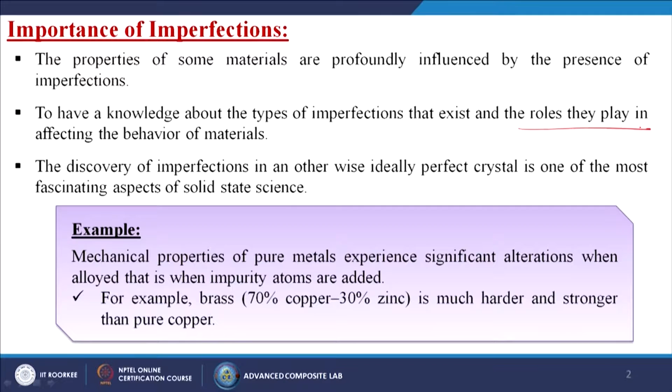For example, brass is made of copper and zinc. If we compare the properties of brass to copper, we find that the brass properties are better than pure copper.

Now we have to know what imperfections are. An ideally perfect crystal is one which has unit cells and contains lattice points throughout the crystal, as we have already read.

The term imperfections, or sometimes called a defect, is generally used to describe any deviations, meaning any little deviations of the ideally perfect crystal, meaning there are some problems in the crystal structure from the periodic arrangement of its constituents.

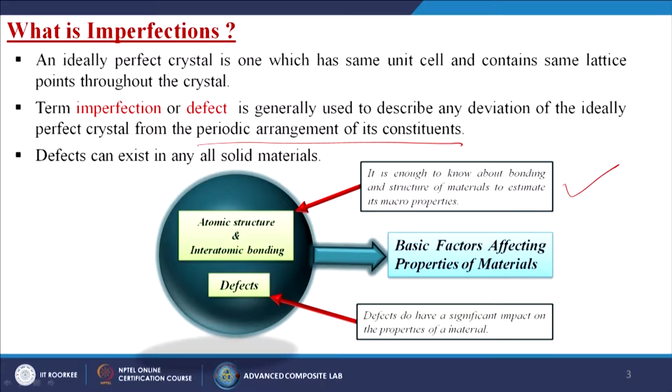Defects can exist in all solid materials. There are some basic factors generally affecting the properties of materials. The first is atomic structure and interatomic bonding. It is enough to know about the bonding and structure of materials to estimate its macro properties, and the other is defects, which have a significant impact on the properties of a material.

First we have to know what crystalline defects are. Generally, crystalline defects mean a lattice irregularity having one or more of its dimensions on the order of an atomic diameter. Generally a crystal or material has a specific crystal structure.

In that crystal structure we can see some kind of vacancy, some kind of defects. These are all known as the crystalline defects of that particular material.

Defects in the crystalline structure can have a tremendous effect on material behavior, because we can change or substitute host atoms, or put new atoms inside the host atoms. This way we can change the material properties.

Physical, electrical, magnetic and optical properties of crystalline materials can be modified by controlling the imperfections in their lattice structure. For ease of characterization, defects are classified on the basis of their geometry or types, as defects are disrupted regions in a volume of solids.

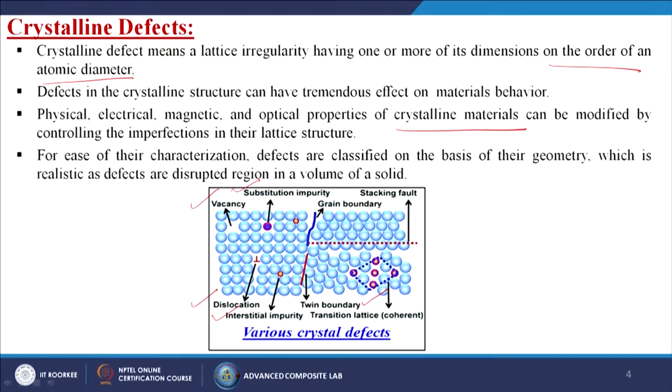From this image we can see there are many types of defects like vacancy, dislocations, some kind of impurity like substitutional impurity or interstitial impurity, some kind of twin boundary problem, grain boundary or stacking fault. There are many types of defects which we are going to discuss one by one in the subsequent slides.

First we have to know the broad classifications of defects based on dimensionality. We can divide defects into 5 types. The first one is called point defects or 0D defects, like vacancy, self-interstitial, and impurity.

If we talk about 1D defects, also known as line defects, like edge dislocations, screw dislocations, and mixed dislocations.

If we talk about surface defects, which are 2D in nature, that is external surfaces, grain boundaries, and twin boundaries.

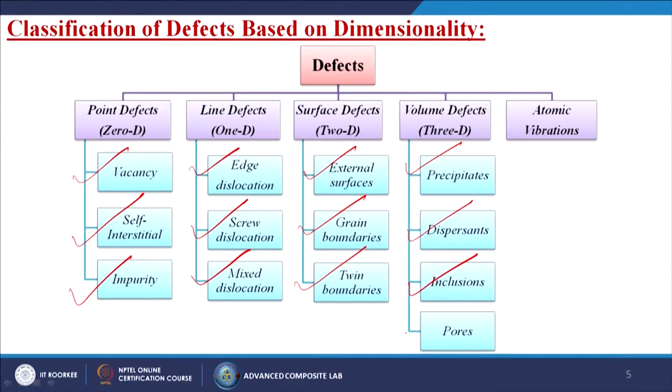And when we talk about volume defects, which are 3D in nature, or sometimes called 3D defects, these are precipitates, dispersants, inclusions and pores, and the last one is known as atomic vibrations.

So, first, what is point defects? Point defects means it is an imperfect point-like region in the crystal, a single point type of defect in the crystal structure. Typical size is about 1 to 2 atomic diameters, also called the 0 dimensional defects. There are several types of point defects like vacancy, impurity, and self interstitial.

What is vacancy? Vacancy is the absence of an atom from its regular atomic site. From this particular image you can see that in this gap some atom should be present, but it is not. So some vacant site has been created, that is known as the vacancy.

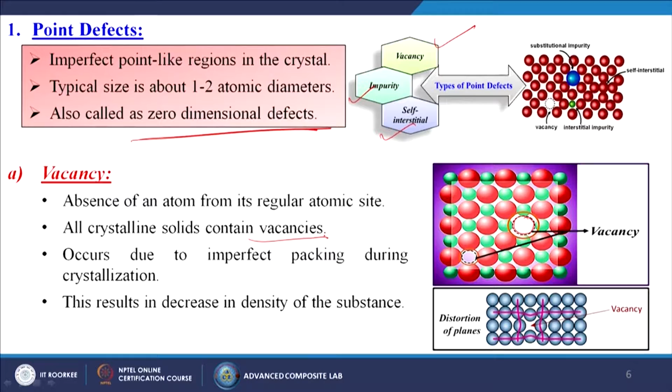All crystalline solids contain vacancies, occurring due to imperfect packing during crystallization. This results in decrease in density of the substance. Yes, of course, because generally the crystal structure is very closely packed. If there is a gap in between, automatically the density will decrease.

So what is the necessity of the existence of vacancies? Generally it can be proved by the principle of thermodynamics. The presence of vacancies increases the entropy or randomness of the crystal. As I told already, when there is no vacancy the atoms are very closely packed, but when any vacancy or gap has been generated, the atoms will try to move in between those gaps.

So the equilibrium number of vacancies, denoted by NV, for a given quantity of material is given by n times exponential of minus QV by KT, where n is the total number of atomic sites, QV is the energy required for formation of the vacancy, and T is the absolute temperature.

So if at the time of calculation of the equilibrium number of vacancies our temperature is in degree centigrade, we have to convert it into Kelvin, and K is known as the Boltzmann constant.

So what is the value of that Boltzmann constant? Generally if the energy is in joules, the value of the Boltzmann constant will be 1.38 into 10 to the power minus 23 joule per atom Kelvin, and if the energy is in electron volts, then the value will be 8.62 into 10 to the power minus 5 electron volt per atom Kelvin.

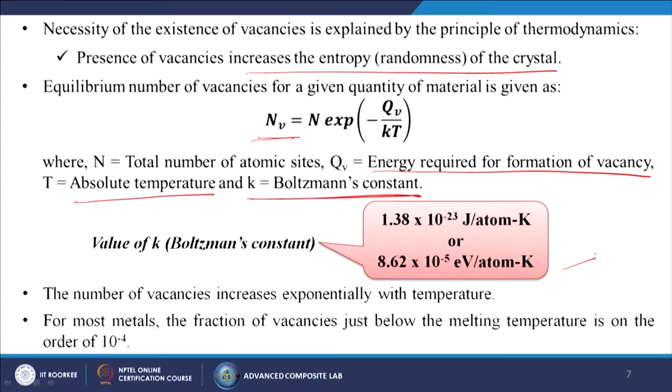Now we are going to discuss about the self interstitial. If the matrix atom occupies its own interstitial site, because from the name itself we can understand that this has been done or created by the host atom itself, the defect is called the self interstitial.

This defect increases the density of the substance. Yes, of course, because there is no vacant place left.

In metals, a self interstitial introduces relatively large distortions in the surrounding lattice strain, since the atom is substantially larger than the interstitial site. In this particular case you can see that the self interstitial atom has been inserted or has taken a place in between the atoms, and it is giving a pressure or strain to the surrounding atoms.

Formation of this defect is not highly probable. It exists in very small concentrations, which are significantly lower than for vacancies.

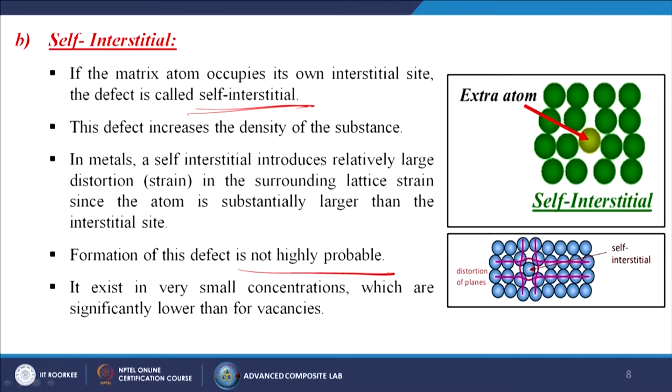Now we are going to discuss about the impurity. Impurity atoms are added intentionally in alloys to impart specific characteristics to the materials.

Yes, of course, sometimes knowingly or unknowingly we are adding impurities to the system, or to the matrix, or to the alloys, or composites. Sometimes we are adding materials with known variations or compositions to increase certain properties. Sometimes while preparing composites, we are adding so many constituents, and through those constituents some impurity unknowingly comes into the system.

Alloying is used in metals to improve the mechanical strength and corrosion resistance. For example, sterling silver is made of 92.5% silver with 7.5% copper alloy.

If I give an example of gold ornaments, generally we are not using 100% gold, because otherwise it will not be malleable. To make the gold into a malleable format, we are adding some kind of material into it so that it can be malleable. Alloying with copper enhances the mechanical strength without depreciating the corrosion resistance, as in the case of sterling silver.

Additions of impurity atoms to a metal will result in the formation of a solid solution or maybe a new second phase. So generally in a system I am having the host atom, and then from outside I am adding another third party atom. A solid solution forms when solute atoms are added to the host material.

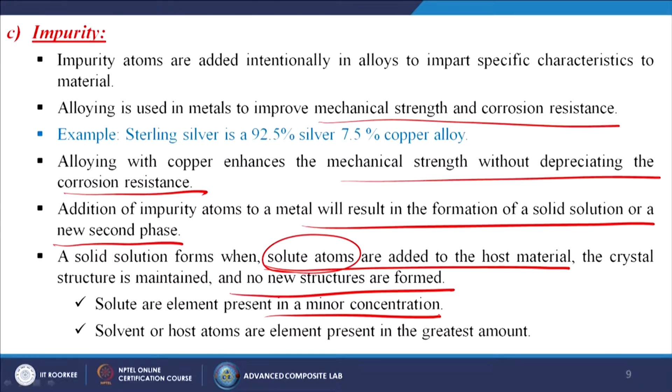Generally there are two ways: solute or impurity elements present in minor concentrations, meaning whatever impurity is added, its concentration or quantity is very less. The other is the solvent or host atoms, whose number is very large, or the greatest amount.

A solid solution is also compositionally homogeneous. Solid solution formation generally depends on three characteristics: the kind of impurity, the concentration, and the temperature of the alloy.

On the right hand side you can see the solid solution of zinc in copper, where the atoms are perfectly in order. But when we talk about compounds, the atoms are very closely packed, but not in order. That is the basic difference between solid solutions and compounds.

Now, if we look at impurity, there are two types: substitutional and interstitial. From the name itself, substitutional means it is substituting some atom. So solute or impurity atoms replace or substitute for host atoms inside the crystal structure.

When talking about interstitial, impurity atoms fill voids or interstices among the host atoms. There is a certain gap, and in between that gap the impurity atom takes place or occupies that area.

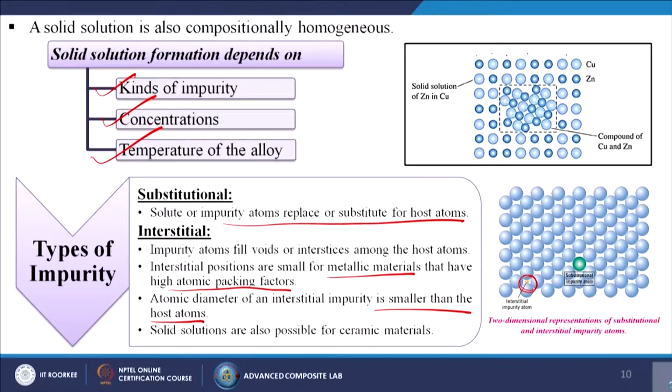Solid solutions are also possible for ceramic materials. Now, what are the factors which determine the degree of dissolving of solute in solvent atoms? The first is the atomic size factor.

The difference in atomic radii between the two atom types should be less than about 15%. Otherwise, the solute atoms will create substantial lattice distortions and a new phase will form. But this is only valid for substitutional impurity, not interstitial.

Then crystal structure: the crystal structure for metals of both atom types must be the same. Then electronegativity: the more electropositive one element and more electronegative the other, the greater the likelihood that they will form an intermetallic compound instead of a substitutional solid solution.

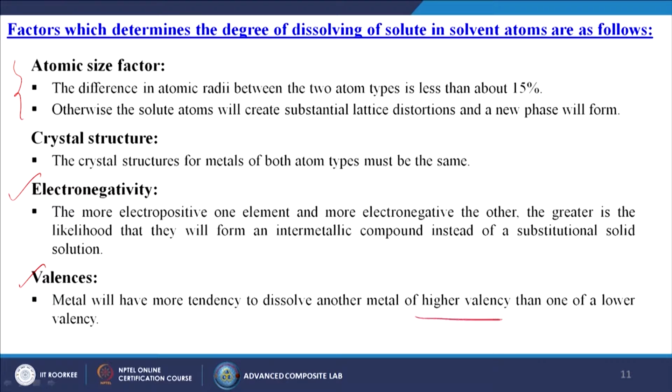Then valences: a metal will have more tendency to dissolve another metal of higher valency than one of lower valency. So these are all the important parameters.

Suppose when we are trying to make any kind of new composites, or doing doping, or inserting impurities into some base metal, these are generally the factors we need to look at. Based on that, we have to choose the proper materials or impurities, and insert them into the host material.

Now what are the specifications of composition? Composition or concentration is the relative content of a specific element or constituent in an alloy. There are two most common ways to specify composition: weight percent and atom percent.

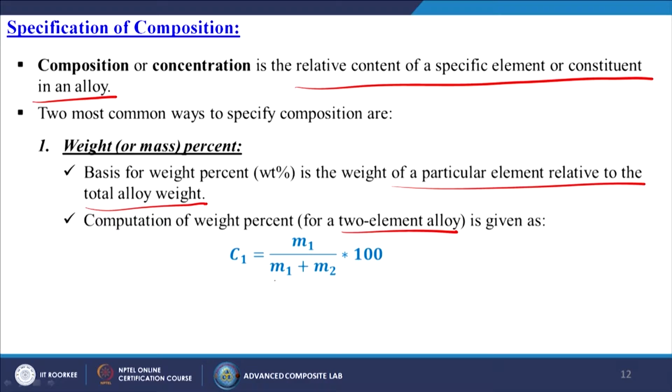What is weight percent? The basis for weight percent is the weight of a particular element relative to the total alloy weight. The computation of weight percent for a 2 element alloy is given as C1 equals M1 divided by (M1 plus M2), times 100, where M1 is for one element and M2 for the second element.

Now, when talking about atom percent, the basis for atom percent calculations is the number of moles of an element in relation to the total moles of elements in the alloy. The number of moles in some specified mass of a hypothetical element 1 may be computed as NM1 equals M1 divided by A1, where M1 and A1 denote the mass in grams and atomic weight for element 1.

The computation of atom percent for a 2 element alloy is given as C1 prime equals NM1 divided by (NM1 plus NM2), times 100. This is how we calculate the weight percentage or atom percent of different elements.

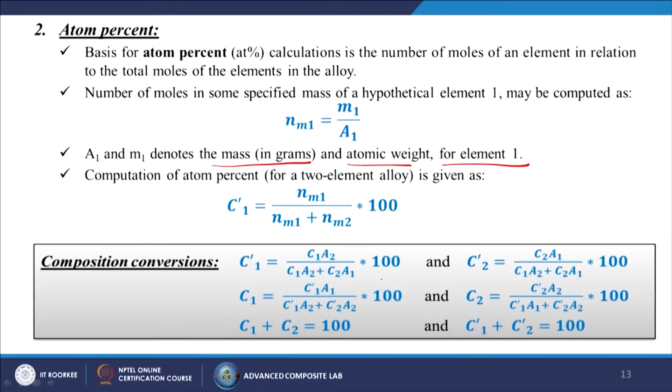We get C1 prime is equal to C1 A2 by C1 A2 plus C2 A1 into 100, and C1 is equal to C1 prime into A1 by C1 prime A1 plus C2 prime A2 into 100. But in any of the cases, C1 plus C2 will be 100, because total composition constituent is 100, or maybe C1 prime plus C2 prime will be 100.

Now, convert the concentrations from weight percent to mass of one component per unit volume of material. So, from units of weight percent to kg per meter cube, the conversion is C1 double prime is equal to C1 by rho 1 plus C2 by rho 2 into 1000, and C2 double prime is equal to C2 by C1 by rho 1 plus C2 by rho 2 into 1000. For density rho in units of gram per centimeter cube, these expressions yield C1 double prime and C2 double prime in kg per meter cube.

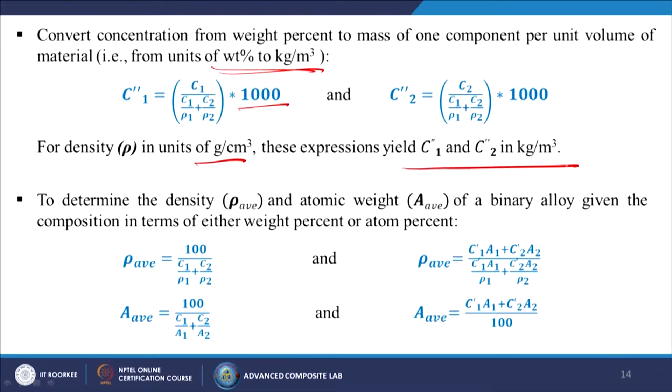This way we can calculate the average density and the average atomic weight of that particular atoms or constituents.

Now we are going to discuss line defects. Generally, from the name itself you can understand the defect takes place along a line, or looks like a line, inside the crystal structure. Line imperfections are also called linear dislocations. They are abrupt changes in the regular ordering of atoms along a line, or dislocation line, in the solids, occur in high densities and strongly influence the mechanical properties of materials. It is characterized by the Burgers vector, named after the scientist Burgers who invented this.

So what is the Burgers vector? The Burgers vector tells us that its direction and magnitude can be determined by constructing a loop around the disrupted region and noticing the extra interatomic spacing needed to close the loop.

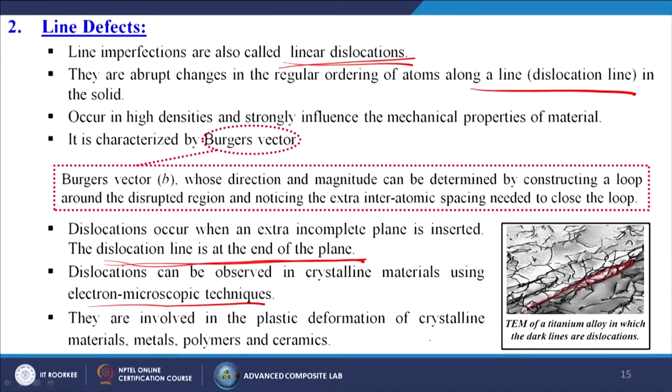Dislocations occur when an extra incomplete plane is inserted. The dislocation line is at the end of the plane itself. This can be proved by the transmission electron microscope image of a titanium alloy, where we can find dark black lines present, known as the dislocations of that particular alloy. Dislocations can be observed in crystalline materials using electron microscopy techniques like HR-TEM, TEM, or scanning electron microscopy like FESEM. They are involved in the plastic deformations of crystalline materials, metals, polymers and ceramics.

Now there are several types of linear dislocations. First is called edge dislocations. What is an edge dislocation? The dislocation is called a line defect because the locus of defective points produced in the lattice by the dislocation lies along a line itself. Here you can see the dislocation, it is in a line and it has been shifted, so it can be present anywhere inside the material.

The edge defect can be easily visualized as an extra half plane of atoms inserted in a crystal structure. You can see the extra half plane in red color, and it is shifting. The Burgers vector, denoted by small b, is perpendicular to the dislocation line. Here this is the line vector, and the Burgers vector is exactly perpendicular to that line vector.

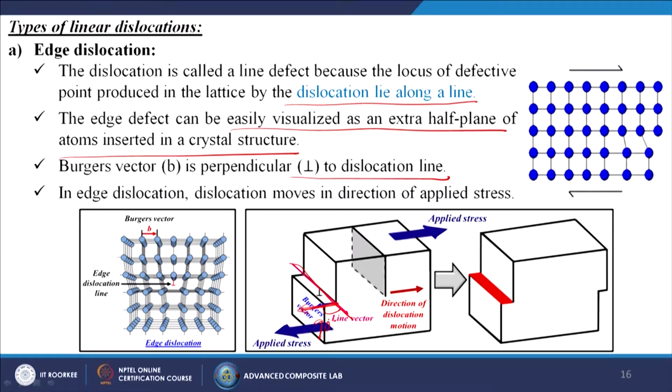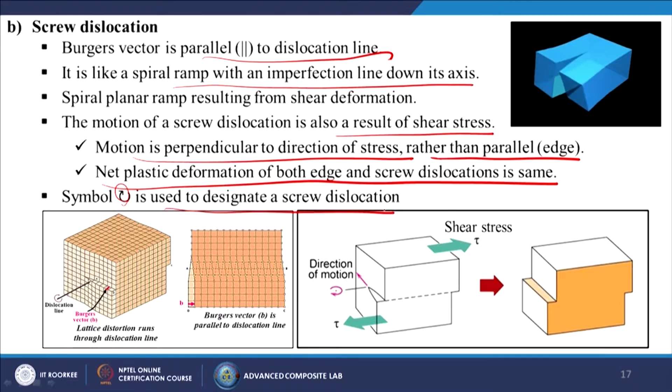Now the third one is called mixed dislocations, where we find both types. They are found in crystalline materials, neither pure edge nor pure screw, but exhibit components of both types. The character of the dislocation may change along its line, however the direction of the Burgers vector remains the same.

So in a mixed dislocation, a screw dislocation at the front of the crystal gradually changes to an edge dislocation at the side of the crystal. So from screw it is starting and then at the end it is showing edge dislocations.

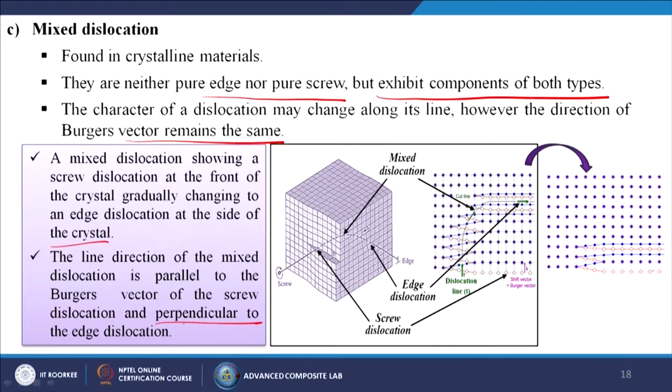So the line direction of the mixed dislocation is parallel to the Burgers vector of the screw dislocation, and perpendicular to the edge dislocation. Next, energy of dislocations.

Dislocations have distortion energy, energy per unit length associated with them. Generally edge dislocations are associated with compressive and tensile stresses, and screw dislocations mainly with shear strains. So the energy of a dislocation per unit length E is more or less equal to half G B squared, where G is the shear modulus and B is the Burgers vector.

There are generally two types of energy for dislocations: one is called elastic energy, another is called non-elastic energy, which is more or less E divided by 10.

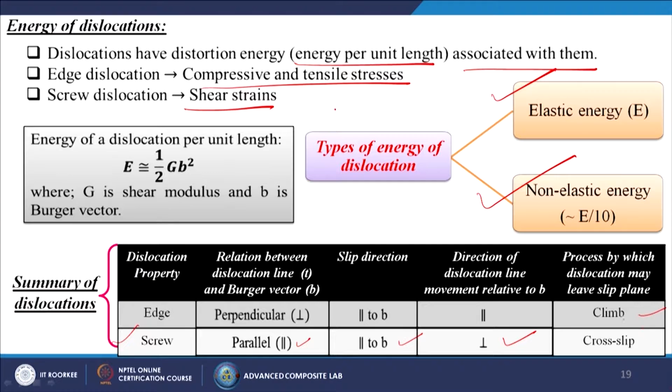Now we are going to discuss surface defects, generally also called interfacial defects. Surface defects are also sometimes known as interfacial defects.

They are boundaries that have two dimensions and normally separate regions of the material that have different crystal structures and/or crystallographic orientations. They refer to regions of distortion that lie about a surface having a thickness of a few atomic diameters. They are not thermodynamically stable, rather they are metastable imperfections arising from the clustering of line defects into a plane.

There are several types of interfacial defects present. The first one is called external surfaces, then grain boundaries, then twin boundaries, then stacking faults, and the last one is called phase boundaries.

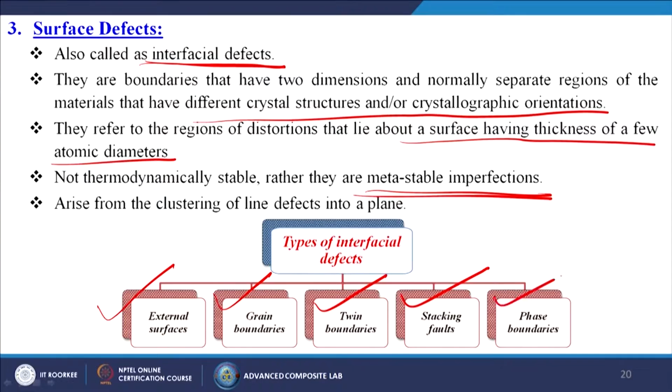So what are external surfaces? The environment of an atom at a surface differs from that of an atom in the bulk, especially the number of neighbors or coordination at the surface is less. Thus the unsaturated bonds of surface atoms give rise to a surface energy.

This results in relaxation, where the lattice spacing is decreased, or reconstruction, where the crystal structure changes. To reduce the energy, materials tend to minimize the total surface area if possible.

Next, grain boundaries. A grain boundary is an interface between two crystals or grains of the same phase but different orientations, meaning it is a kind of boundary wall between two different grains.

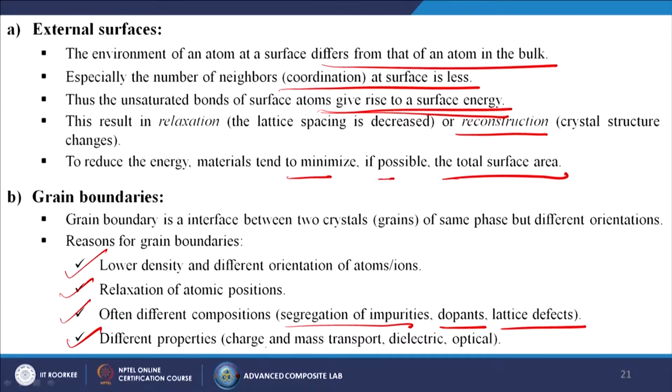Reasons for grain boundaries: lower density and different orientations of atoms or ions, relaxation of atomic positions, often different compositions meaning segregation of impurities, dopants or lattice defects, and different properties like charge and mass transport or dielectric or optical properties.

Grain boundaries are several atoms distance wide, and there is a mismatch of orientation of grains on either side of the boundary. Various degrees of crystallographic misalignment between adjacent grains are possible. Boundaries are described in terms of aligned dislocation arrays.

Internal surfaces of a single crystal where ideal domains meet with some misalignment result in high and small angle grain boundaries. So there are generally two types of grain boundary: one is called small angle or low angle grain boundary, the other is called high angle grain boundary.

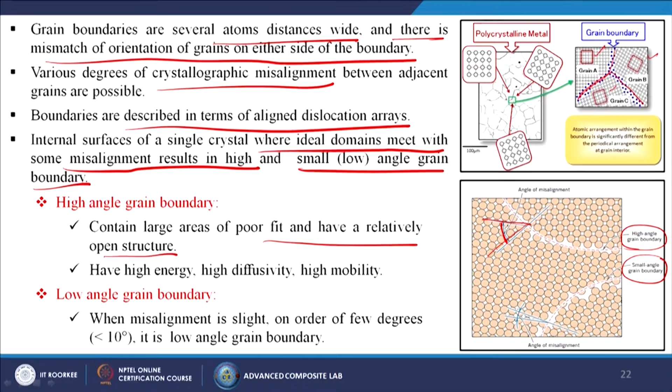In this case the angle of misalignment is more, so that is why it is called the high angle grain boundary, and in this case the angle of misalignment is less, so that is why it is called the low angle grain boundary.

High angle grain boundaries have high energy, high diffusivity and high mobility. For low angle grain boundaries, when misalignment is slight, on the order of a few degrees less than 10 degrees, meaning the area of misalignment is low, it is called a low angle grain boundary.

There are grain boundaries of two types: tilt boundary and twist boundary. In the tilt boundary, the grain boundary has been tilted at some angle, and twist means there is a certain kind of rotation between the grain boundaries.

In the twist boundary, it is rotation about an axis perpendicular to the plane itself. They are low angle grain boundaries formed by screw dislocations.

Both tilt and twist boundaries are planar surface imperfections, in contrast to high angle grain boundaries. For high angle grain boundaries, the degree of disorientation is of large range, that is more than 15 degrees.

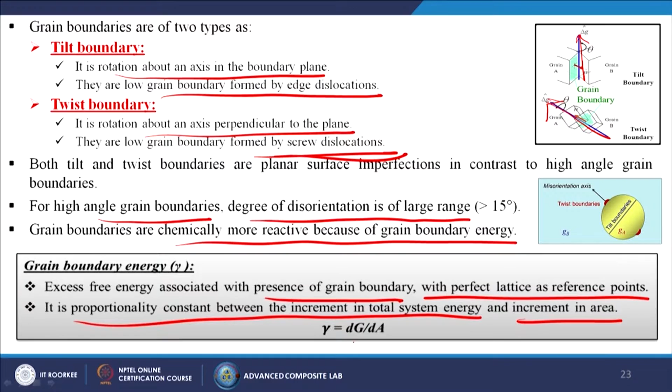Grain boundaries are chemically more reactive because of grain boundary energy. What is grain boundary energy? Generally it is denoted by gamma: the excess free energy associated with the presence of a grain boundary, with perfect lattice as reference point. It is the proportionality constant between the increment in total system energy and increment in area. So gamma is equal to dG by dA.

Now we are going to discuss twin boundaries. This is a special type of grain boundary across which there is specific mirror lattice symmetry. This is known as the twin plane of that boundary, where a mirror-like image is formed on the opposite side.

Twin boundaries occur in pairs such that the orientation change introduced by one boundary is restored by the other. The region between the pair of boundaries is called the twinned region - a mirror image.

Twins result from atomic displacement due to applied mechanical shear force and also during annealing heat treatment. Twins do not extend beyond a grain boundary.

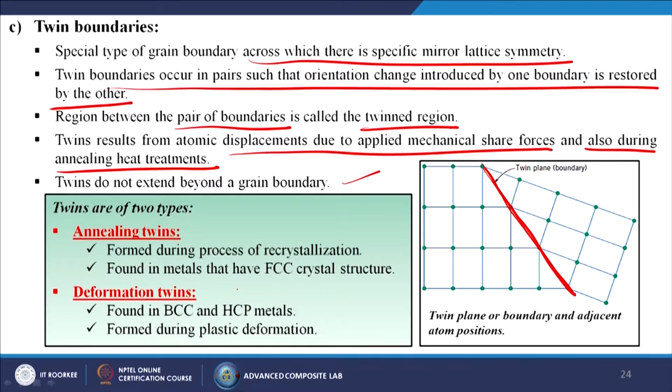Twins are also of two types: annealing twins and deformation twins. Annealing twins are formed during the process of recrystallization, found in metals that have FCC (face centered cubic) crystal structure. Deformation twins are found in body centered cubic and HCP metals, formed during plastic deformation.

Next is stacking faults, formed by a fault in the stacking sequence of atomic planes in the crystal, found in FCC metals when there is an interruption in the ABC, ABC, ABC and so on stacking sequence of close packed planes. Here you can see ABC, ABC, then A is missing, then BC, again ABC, ABC. This is known as a stacking fault, occurring generally in the stacking arrangement of the FCC structure.

Next is phase boundaries. Phase boundaries exist in multi-phase materials, across which there is a sudden change in physical or chemical characteristics of the materials.

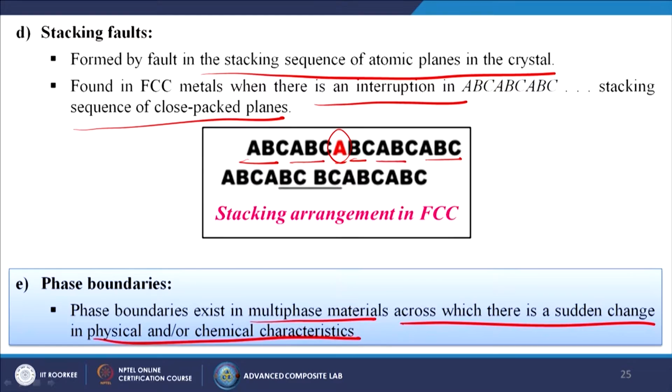Then volume defects, also called three-dimensional defects or bulk defects. They are normally introduced during processing and fabrication steps, and manifest themselves macroscopically as pores and cracks. They are divided into 4 types on the basis of the size of defects and the effect they have on properties of the crystal. The first type is called precipitates.

What is a precipitate? Small particles introduced into the crystal matrix by solid state reactions, which increase the strength of the alloy.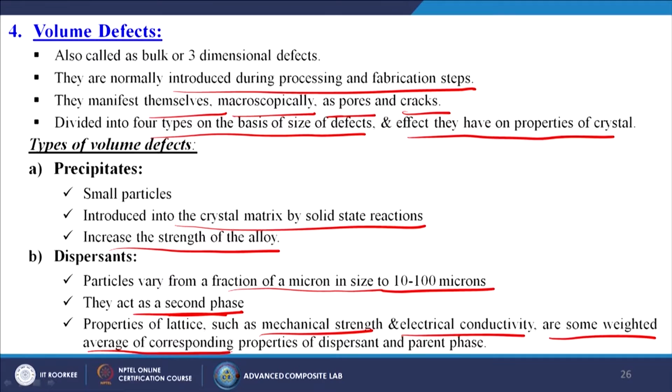The second type is called dispersants - particles varying from a fraction of a micron in size to 10 to 100 microns. They act as a second phase. The properties of the lattice, such as mechanical strength and electrical conductivity, are some weighted average of the corresponding properties of the dispersant and parent phase, that is, a mixing of both phases.

Then inclusions - from the name itself you can understand that inclusions means introducing something inside the matrix. Foreign particles or large precipitate particles are included as undesirable constituents in the microstructure, which are harmful in microelectronic devices.

Inclusions are important factors when it comes to gem valuation - inclusions inside a diamond, meaning some kind of unwanted material has been inserted into the diamond. In many gemstones such as diamonds, inclusions affect the clarity of the stone and diminish its value.

Yes, of course, because it is reducing the cost, because some kind of third party element which is cheaper in nature has been incorporated, or maybe it is already present inside the diamond itself. So the cost of the diamond will reduce and the clarity of the stone, or maybe the glittering property of that particular stone, has been decreased.

In some stones, star sapphires, inclusions actually increase the value of the stone itself. Inclusions disturb the geometry of a device by interfering in manufacturing, or alter its electrical properties by introducing undesirable properties of their own. Then the next one is voids, or maybe pores.

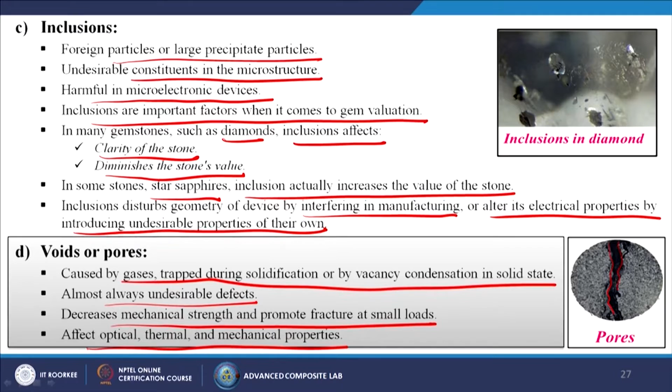Almost always undesirable defects, they decrease mechanical strength and promote fracture at small loads, affecting optical, thermal and mechanical properties. In this particular image, through this FE-SEM type image, you can see that a void has cracked, or pores or cracks have been generated. Then, atomic vibrations.

It occurs at zero temperature and increases in amplitude with temperature itself. At any given time, each atom in a crystal is vibrating about its lattice position within the crystal. From this image you can see that vibration is taking place inside the crystal structure. Vibrations transiently displace atoms from their regular lattice sites, which destroys the perfect periodicity. Due to that vibration, some atoms may be shifted from their original place. In a sense, these atomic vibrations may be thought of as imperfections or defects.

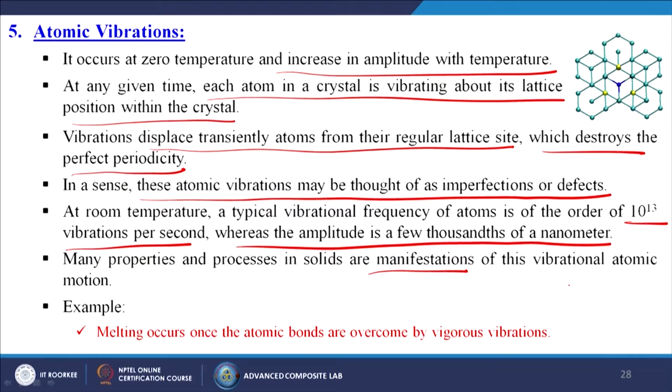At room temperature, a typical vibrational frequency of atoms is of the order of 10 to the power 13 vibrations per second, whereas the amplitude is a few thousandths of a nanometer. Many properties and processes in solids are manifestations of these vibrational atomic motions. What are the examples? Melting occurs once the atomic bonds are overcome by vigorous vibrations. So when we are heating the material, vibrations start between the atoms, and due to that, melting of the metal occurs.

Then we are going to discuss imperfections in ceramics. Generally it includes point defects and impurities. So what are point defects in ceramics? It is non-stoichiometric, referring to a change in composition. The effect of non-stoichiometry is a redistribution of atomic charges to minimize energy. Charge neutral defects include the Frenkel defect and the Schottky defect.

So what is a Frenkel defect? It involves a cation vacancy and a cation interstitial pair. So the vacancy has been created over here. The cation moves from a regular site to the interstitial site, so from here it has moved from here to here.

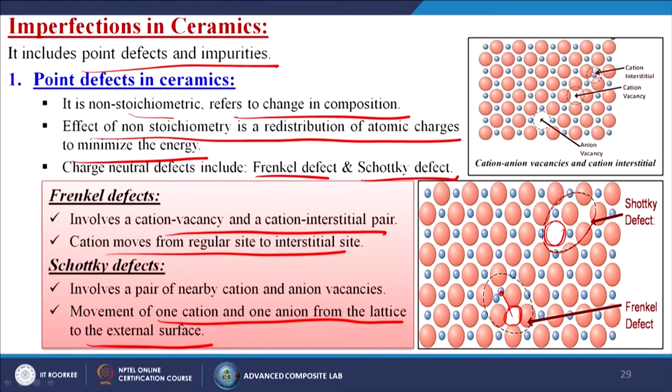And what is a Schottky defect? It involves a pair of nearby cation and anion vacancies. So in this particular zone, both cations and anions have been shifted. It's the movement of one cation and one anion from the lattice to the external surface, and that is known as the Schottky defect.

The equilibrium number of both Frenkel and Schottky defects increases with and depends on temperature. For Frenkel defects, the number of cation vacancy or cation interstitial pairs, known as NFR, is given as NFR equals n times exponential of minus QFR by 2kT, where QFR is the energy required for formation of each Frenkel defect, n is the total number of lattice sites, K is Boltzmann's constant or the gas constant, and T is the absolute temperature.

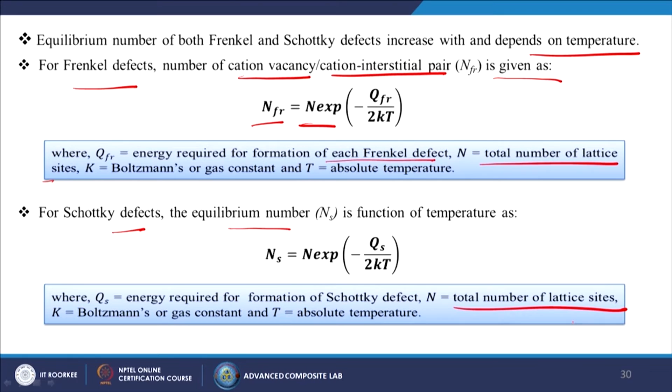And for Schottky defects, the equilibrium number Ns is a function of temperature, Ns equals n times exponential of minus Qs by 2kT. Here Q is the energy required for formation of the Schottky defect, n is the total number of lattice sites, K is the Boltzmann constant or gas constant, and T is the absolute temperature.

Now, what is the difference between Schottky and Frenkel defects? First, Schottky defects occur due to loss of atoms from the crystal lattice in stoichiometric units. It decreases the density of the crystal, and is found in highly ionic compounds with high coordination number, having cations and anions of similar sizes.

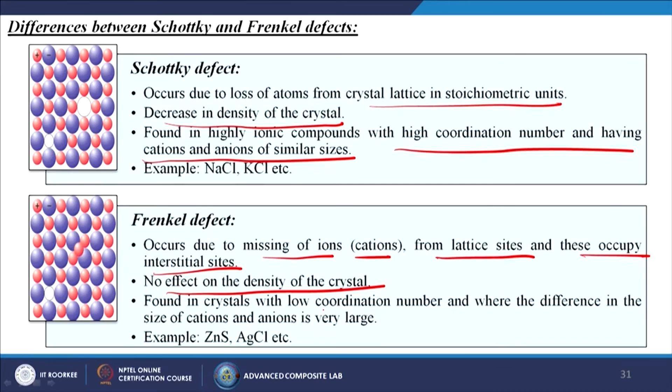Examples are sodium chloride (NaCl), potassium chloride (KCl), etc. What is a Frenkel defect? It occurs due to missing of cations from lattice sites, which then occupy interstitial sites. It has no effect on the density of the crystal, and is found in crystals with low coordination number where the difference in size of cations and anions is very large. Examples are zinc sulphide or silver chloride.

Now, impurities are also present in ceramics, which create some kinds of defects inside the ceramic structure. Charge balance must be maintained when impurities are present. For example, electronegative impurities that substitute lattice anions, or electropositive substitutional impurities. Impurities can form solid solutions in ceramic materials.

When we talk about substitutional impurity, it will substitute for the host ion to which it is more similar electrically. To achieve appreciable solid solubility of substituting impurity atoms, the ionic size and charge must be very nearly the same as one of the host atoms. Since there are both anions and cations in ceramics, a substitutional impurity will replace the host ion most similar in terms of charge. Thus, if a substitutional impurity has a different charge than the substituted ion, another defect must be present to balance it out.

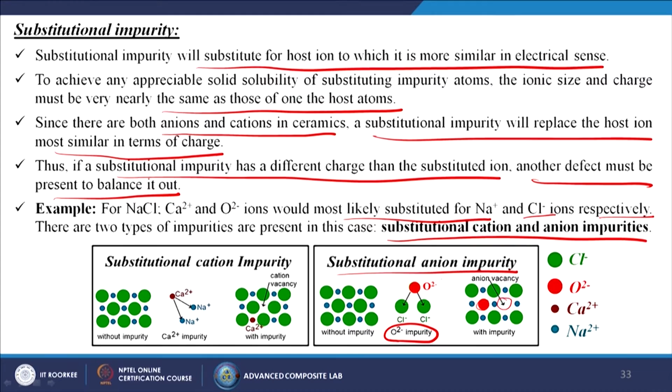In this case, this is without impurity, and here Ca2+ is the impurity, so cation vacancy takes place in this case. When we talk about substitutional anion impurity, this is without impurity - we are having 2 Cl- which is stacked with O2-. Here O2- is the impurity, taking place in this particular zone, and anion vacancy is taking place here, which is called substitutional anion impurity.

Now the last one, defects in polymers. It is very critical, and also very difficult to measure. Different from ceramics and metals, chains can bond together forming loops and can tie two molecules together. Impurities may include interstitials, side branches, or incorrect blending. Screw dislocations also occur in polymer crystals. Vacancies can occur and alter the chain sequences. Every chain end is considered a defect.

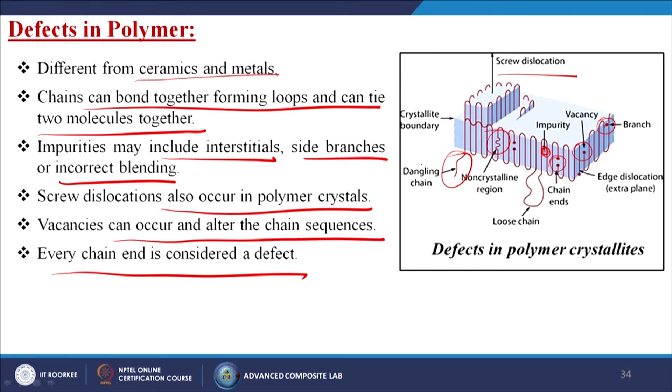So in this case, screw dislocation is taking place in this particular zone, impurity has been added, some chain ends are taking place, vacancy looks like this, or some kind of branching is taking place. Here this is the non-crystalline region, or some kind of dangling chain, or loose chain. So there are several types of defects, but it is very difficult to understand defects inside the polymer.

So now we have come to the end of this lecture, and we have to summarize. In this lecture we have discussed point, line, surface and volumetric defects which exist in all solids. The number and type of defects can be varied and controlled - for example, temperature controls the vacancy concentrations. Defects affect material properties, like grain boundaries controlling crystal slips.

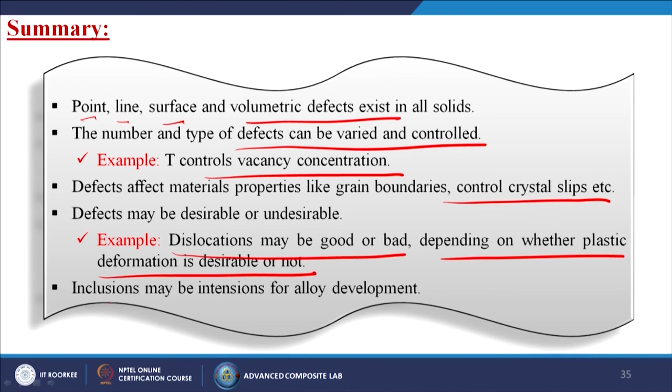Defects may be desirable or sometimes undesirable. Sometimes they can improve material properties by inserting some materials, or sometimes they may reduce material properties. For example, dislocations may be good or bad depending on whether plastic deformation is desirable or not. Inclusions may be intentional for alloy development - sometimes intentional, sometimes unintentional. Thank you.